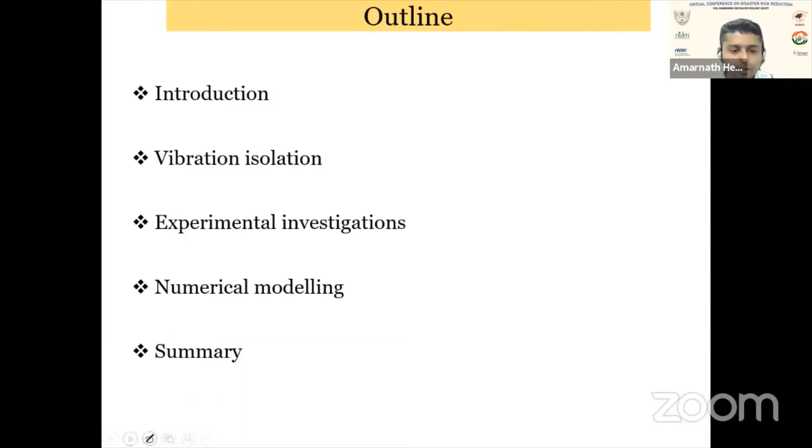Vibrations are very common nowadays. They can be generated from various construction activities, from the movement of vehicles or trains, and from industrial structures and machine foundations. From the vibration source, these vibrations typically travel along the ground surface as a surface wave, specifically as a Rayleigh wave, and these waves can damage nearby structures.

As long as these vibrations are within certain permissible limits, buildings will be fine. Otherwise, it will lead to failure of the buildings, cracking, and in the larger term, cause some amount of disaster. Surface waves can be extremely dangerous, but some part of the vibration also travels along the deeper stratum as body waves, which are not so harmful. The Rayleigh waves, or surface waves, generally cause failure due to this kind of vibration.

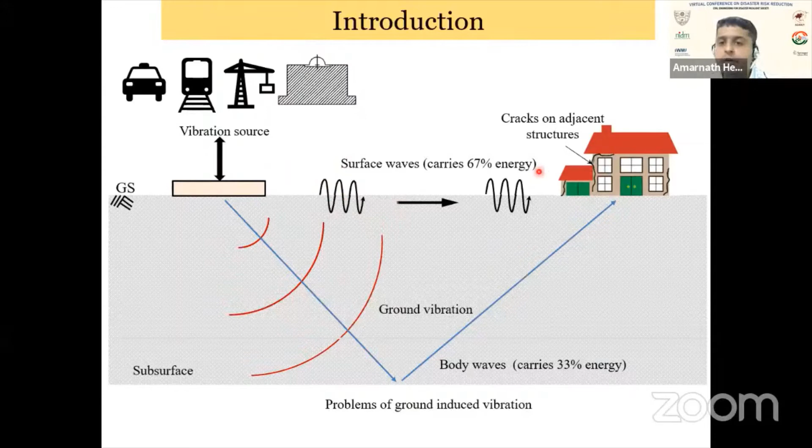These are some photographs which I took during one of my site visits near Patna. This particular building is very near the main railway track, the Delhi-Kolkata railway track, and due to the frequent movement of trains, we can see a lot of cracks in the building.

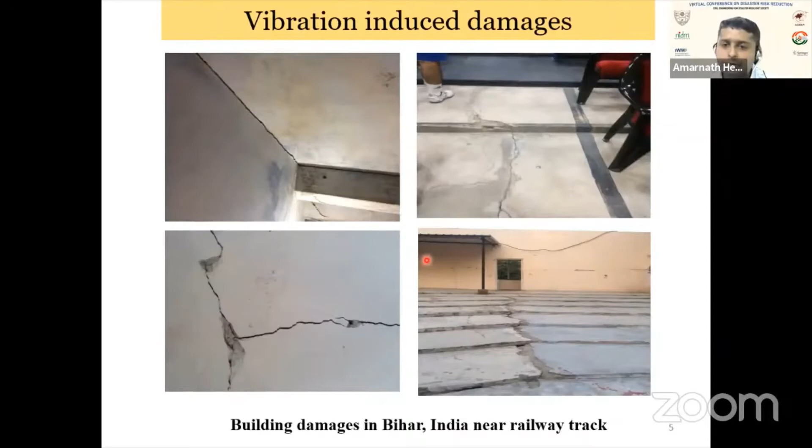So these are all sorts of cracks in the structure, in the floor, everywhere. And this kind of cracks can lead to a disaster. It can lead to a failure of these kinds of buildings.

So each country basically has its own guidelines for these vibrations, and they have developed their own threshold values. Below this threshold value, if the vibration is there, then there is no harm to the building. But the instant the vibration exceeds a particular limit, the buildings can be subjected to some amount of risk.

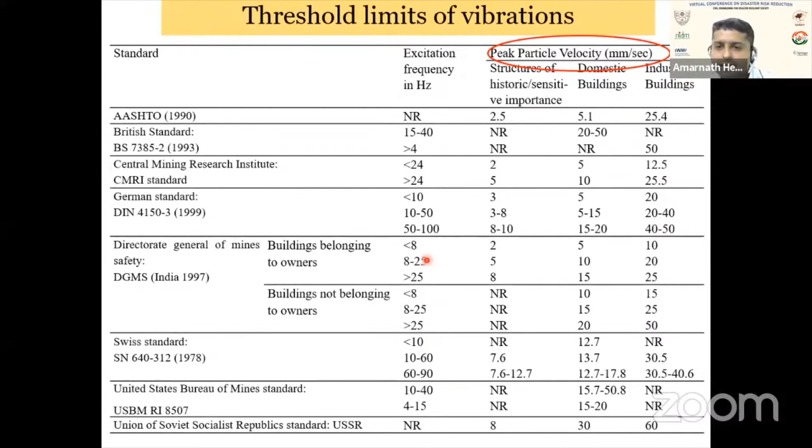Generally, these vibrations are measured by a parameter called peak particle velocity, which is nothing but the velocity of the particle due to the vibration. Under the vibration, particles will vibrate. If you measure that velocity in 3 orthogonal directions and take the average, it gives the peak particle velocity.

Different countries or different standard codes have their own guidelines, be it AASHTO, British standard, German standard, or Swiss standard. All these have their own guidelines for the threshold value of vibration. These vibrations are categorized into sensitive buildings, domestic buildings, and industrial structures.

It also depends on the frequency of the incoming vibration. The frequency of the vibration again depends on the source of the vibration. If it's a railway vibration, the frequency will be somewhat different. If it is a machine foundation, the frequency will be different.

But as long as these vibrations are within permissible limits, there is no problem to the buildings. The instant it exceeds this particular threshold, it can lead to cracking in the building. So whenever it exceeds these threshold limits, the isolation aspect comes into picture.

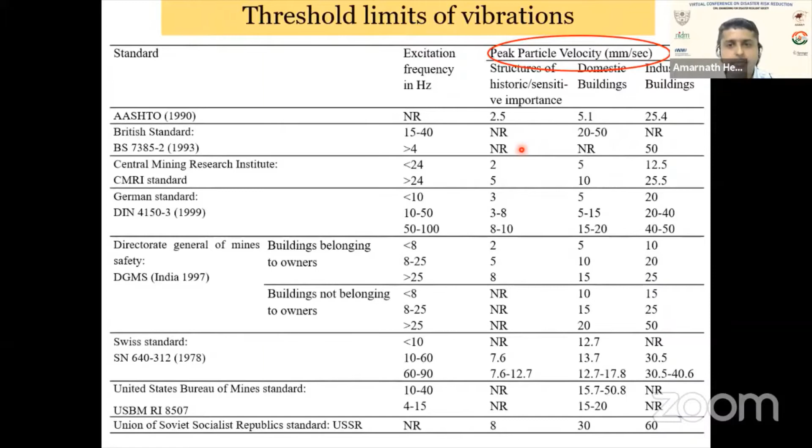Isolation is nothing but reducing the intensity of the vibration, or protecting the structure from the incoming vibrations. If you look into the literature, there are various isolation methods being followed all over the world.

The most popular one is wave barriers, in which we create some sort of open and infill trenches for isolating the buildings from vibrations. If it is a machine type of loading, then we can go for absorbing systems like springs or rubber coil systems. Else, we can also strengthen the ground using any of these methods for altering the incoming waves.

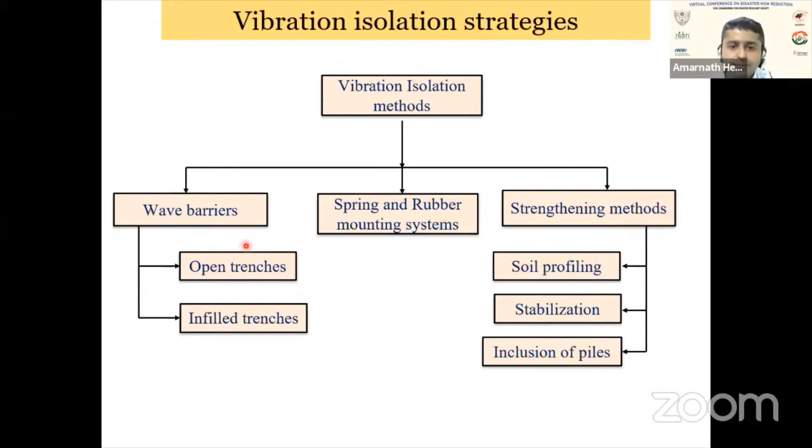So the most popular one is basically these wave barriers, open trenches or infill trenches. In this trench system, how it operates is that this is basically a source of vibration, and we will basically create shallow trenches near to this source of vibration.

Since the vibration waves are basically surface waves, these shallow trenches will create some sort of obstruction for the coming waves, hence reducing the intensity of the vibration. These trenches can be open trenches, or they can also be infill trenches where we fill some absorbing material.

If the trenches are placed near to the source of vibration, we call it an active isolation system. If the trench is placed near to the structure to be protected, then we call it a passive isolation system.

This particular system is relatively effective and has good efficiency in isolating vibrations, but the only concern is the depth of these trenches. Generally, the depth of the trench varies from 3 to 4 meters.

If you consider a scenario in an urban area or soft soil, creating a trench of 3 to 4 meters deep is extremely challenging, due to safety concerns, environmental issues, or stability aspects. In those cases, we sometimes infill with soil, which will slightly increase the stability, but the efficiency-wise, it will not improve that much.

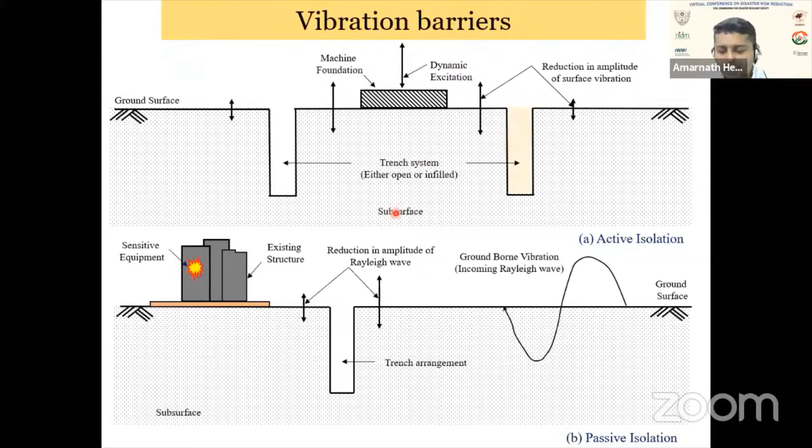Because of all these limitations, what we are trying to propose is to develop a new sort of isolation system, which can be placed just below the vibration source. I can call it an active isolation system, because it's placed exactly below the vibration source, and it is made up of a material called geosynthetics, which is a polymeric material.

We are proposing to use materials like geocells or biaxial geogrids to be part of this vibration isolation barrier, such that it can absorb some amount of vibration. These geosynthetics are popularly used for increasing the bearing capacity of the soil or reducing settlement. If they can absorb some amount of vibration as well, it will be a manifold benefit — bearing capacity-wise, settlement-wise, and also isolation of vibration.

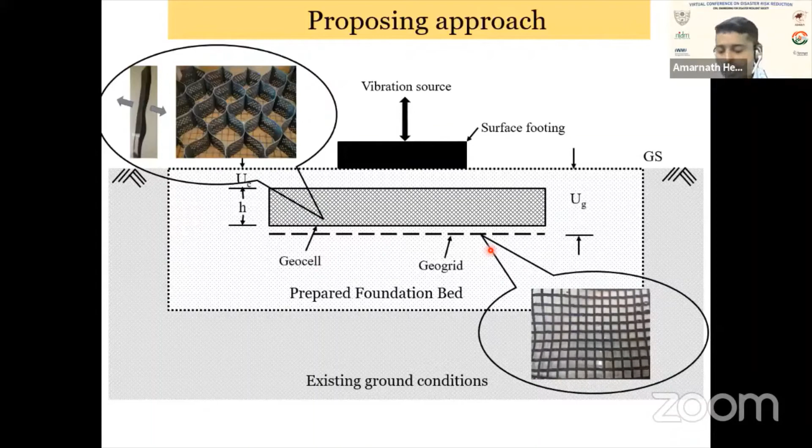So we can place this kind of material below machine foundation, below railway tracks, below the pavement. All these are major sources of vibration. The reason we have gone for this geosynthetic material is because these are economical, and we wanted to develop a cost-effective isolation system that facilitates easy construction. These are extremely durable and resistant to extreme weather conditions, and no heavy machineries or specialized skilled labor force is required to construct these geosynthetic structures. Because of all these advantages, we thought of using this material for developing an isolation system which can absorb the vibration.

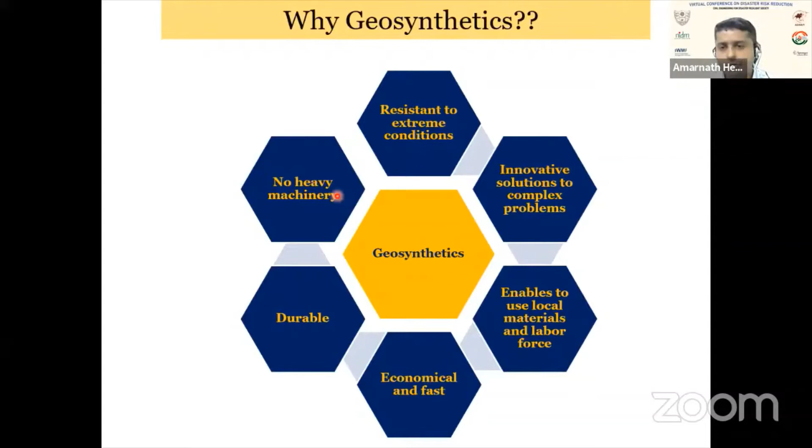So these are the two materials I'm going to talk about. One is biaxial geogrid, which is a planar type of geosynthetic material, and the other is a three-dimensional type of geosynthetic material, which we call geocell. In case of geocell, we fill this geocell pocket with granular geomaterial like soil or sand, which helps the geocell apply all-round confinement to the soil and overall improve the performance. In case of the biaxial geogrid, it will also improve the lateral confinement on the soil by virtue of frictional and passive resistance.

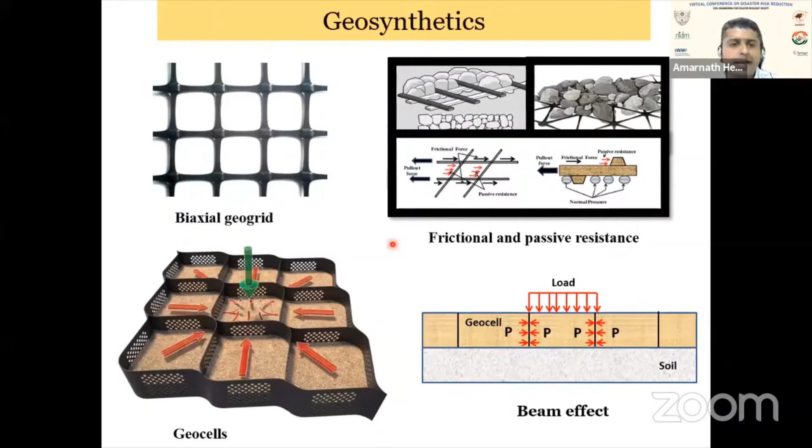Whenever we use this kind of material, it will basically generate some friction between the soil and the geosynthetics—we call it frictional resistance. Also, these ribs will try to confine the movement of the soil. So by virtue of that, both these materials are known for applying lateral confinement to the soil, and thereby improve the performance of the soil.

So now I enter into our experimental investigation. These are field vibration tests we have conducted just to demonstrate that this geosynthetic-based isolation system can absorb vibration and increase the isolation efficiency of foundation beds. In this experimental setup, initially we construct a foundation bed made up of geosynthetics, and above that we place an artificial source of vibration using a mechanical oscillator. This oscillator can vibrate at different frequencies ranging from 5 Hz to almost 50 Hz, and it is connected to a DC motor which helps us change the frequency.

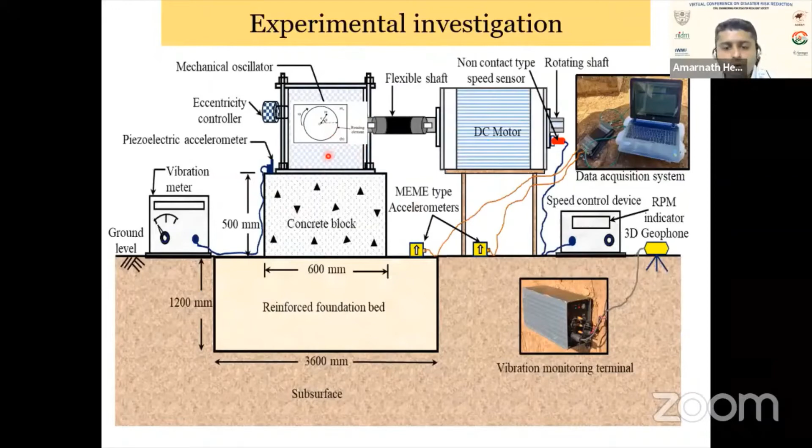Under this particular vibration, we have recorded the vibration along the ground surface. Exactly below this vibration source, we have a reinforced foundation bed to a depth of almost 1.2 meters, and using accelerometers, geophones, and vibration meters, we try to record various parameters like acceleration and displacement on a real-time basis. Using this particular computer, we have captured all this data in real time under the source of this vibration. And this is how the setup looks like.

It is a very tedious experiment, I can say. Initially, we have to create a trench and develop it using a geosynthetic foundation bed. Then we have to use various sensors on a real-time basis to capture all these physical parameters. In order to demonstrate this low-cost protection or isolation system, we have considered 4 cases, which I'm going to discuss—it's only a part of our research.

Initially, we have taken a normal foundation bed with no geosynthetics. In the second case, we have used geogrid, a planar type of geosynthetic, below the vibration source. In the third case, we have used a secondary geogrid layer below the primary layer, just to see the effect of this secondary layer on the primary layer and the overall vibration isolation efficiency. In the final case, we have considered a three-dimensional geosynthetic product, geocell, and we have also tried to fill this geocell with different infill conditions in the field.

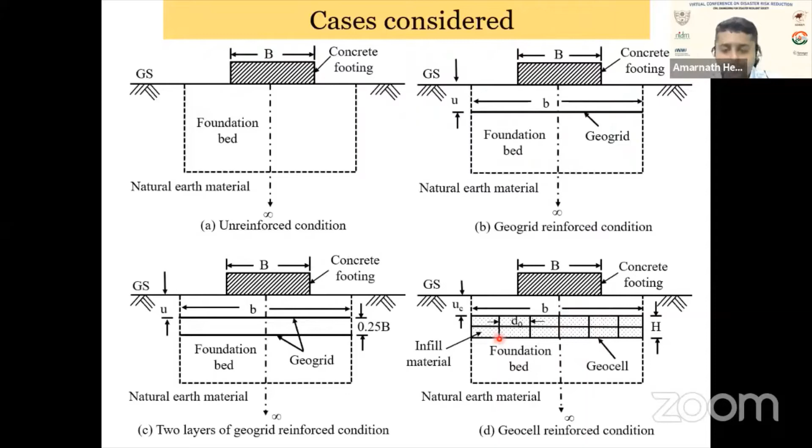So I want to show some photos of how we created a test bed. Initially, this kind of trench has to be dug up in the soil. Then we have to place the geosynthetics in layers. If going for more than one layer, we have to properly compact it and maintain uniform density and moisture content throughout the bed. This one is for the geogrid reinforced case, and this one is for the geocell reinforced case—we can see we are filling it with some local infill soil as part of the geocell.

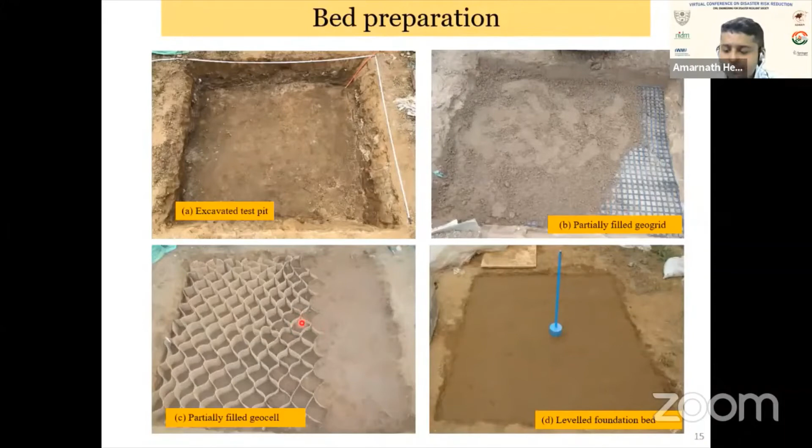I don't want to get into too much detail on the material properties, but I can say that for the geocell we used Neoloy-based geocell, which is a commercial name for the geocell, and a biaxial geogrid made up of polyester, both used as part of the isolation system.

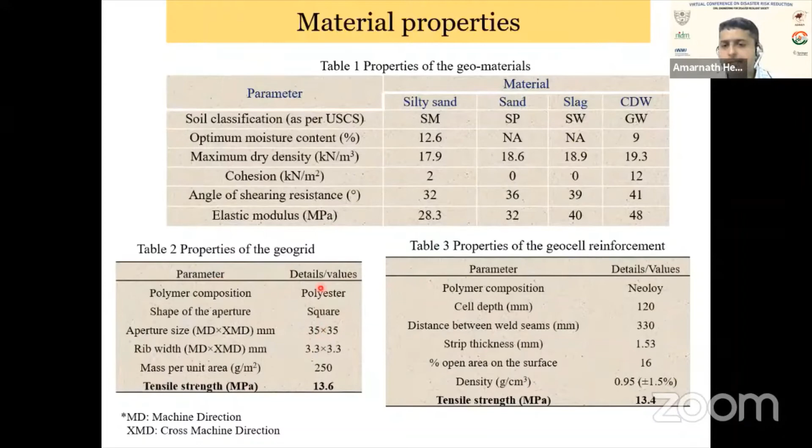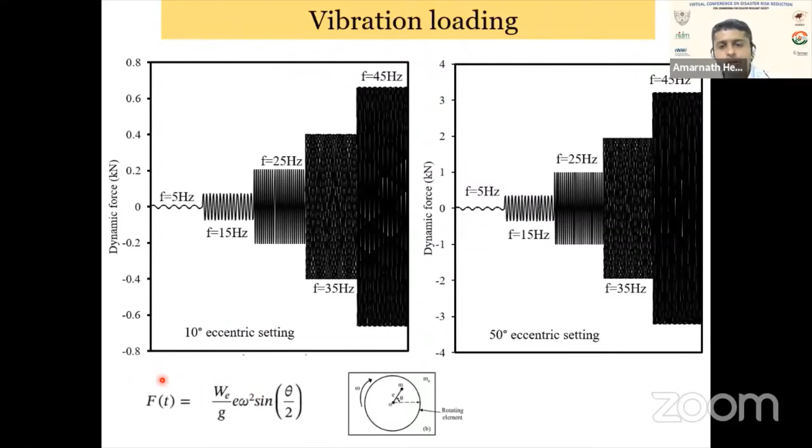I want to show some interesting results. When we change the frequency of vibration, we recorded the displacement of the concrete block used to support the vibration source. With the increase in frequency, at a particular frequency, suddenly the displacement got increased. In all cases, this increase in displacement can be seen - for unreinforced, single layer geogrid, 2-layer geogrid, and geocell.

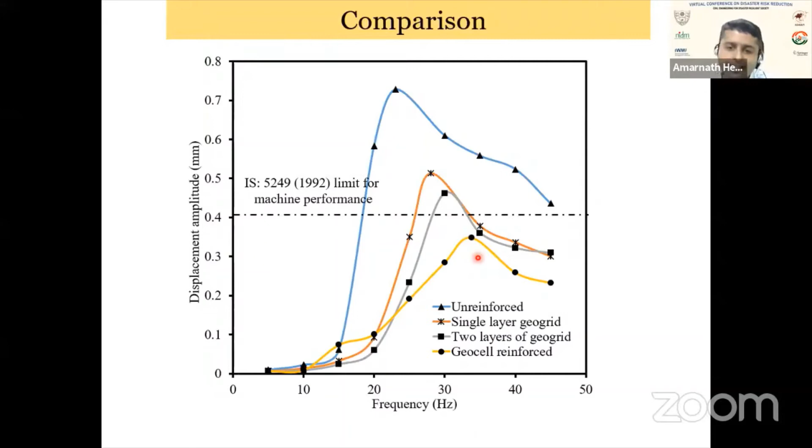This particular condition we call resonance. In resonance, the frequency of the vibration matches with the natural frequency of the soil foundation system, and under this, suddenly the displacement shoots up. If you consider 4 different cases, due to the provision of geosynthetics, there is a drastic reduction in displacement during resonance. When we place the geocell reinforcement, the displacement even under resonance was within the permissible limit provided by the Indian standard. So from here onward, whatever parameter I compare, like peak particle velocity, all are compared corresponding to this resonance condition, because it makes sense to compare these parameters for different reinforced beds under the resonance condition, since at that instance the displacement will be maximum.

So we tried to measure the peak particle velocity again on the reinforced foundation bed on the surface. We could only measure up to 2 meters because it's a field experiment we conducted. Peak particle velocity, as I told, is a unit used to measure the intensity of vibration. We compared 4 different cases here: unreinforced, single layer geogrid, 2-layer geogrid, and geocell reinforced. Here we can see, if you compare the first case and the last case, there is a drastic reduction in the intensity of vibration, or in the peak particle velocity.

If you calculate percentage-wise, it's almost 50% reduction in peak particle velocity noted in the presence of geocell reinforced condition. Even the geogrid reinforced case provided a reduction in peak particle velocity. This gives us a lot of indication that these materials can somehow absorb the vibration or reduce the intensity of vibration just below the vibration source.

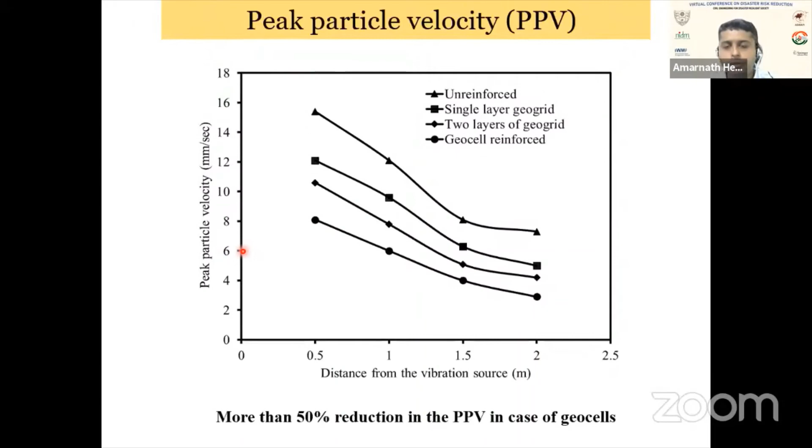We also calculated the displacement on the reinforced soil bed, in terms of percentage reduction in displacement. We call this term PRDA, which is the difference between the displacement of the unreinforced bed and the reinforced bed. If you take the ratio with the unreinforced bed, we get this particular ratio, which tells us how much the displacement of the reinforced bed reduces under this reinforced condition. Comparing different cases with the unreinforced case, the geocell reinforced case yielded the maximum reduction in displacement of the reinforced foundation bed. Almost more than 50% reduction in PRDA was observed in the presence of geocells.

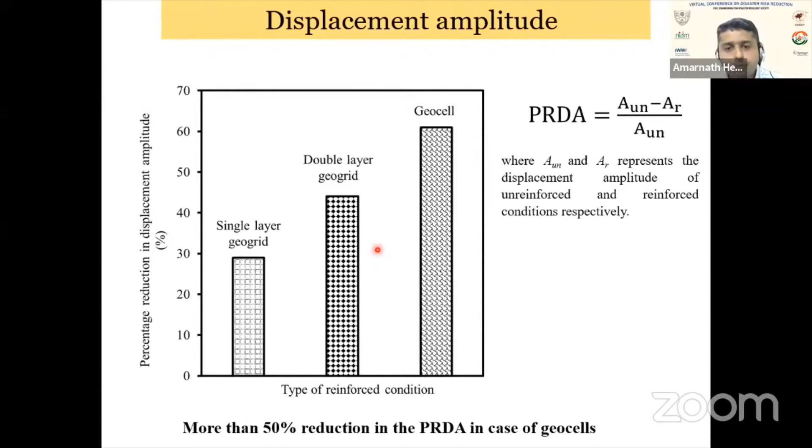Next, we calculated the isolation efficiency of different reinforced conditions. This isolation efficiency is calculated using this simple equation, where ARF is the ratio of displacement of a reinforced foundation bed to the displacement of the unreinforced foundation bed at a particular frequency and eccentric setting. We compared the isolation efficiency for different cases, plotted against distance. I want to draw your attention to this line for the geocell reinforced case, where the efficiency of almost 70% was noted. So a 70% improvement in isolation efficiency as compared to the unreinforced bed was observed in the presence of the geocell reinforced case.

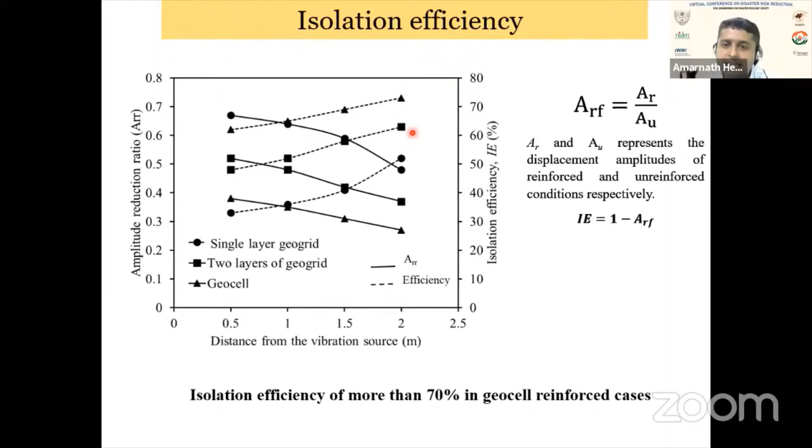This is a very good sign, but experimental investigation could not give us the mechanism why this isolation happens. By providing these kinds of materials, we can only quantify how much vibration isolation efficiency can take place. If you want to develop a mechanism, then we have no option.

We have to go for 3-dimensional numerical modeling, because first of all, these field tests were extremely tedious, and secondly, we cannot see the distributions of stresses and strain in experimental studies. So we have developed 3-dimensional numerical models to find out the mechanism of isolation, taking 4 different cases as in the experimental condition: unreinforced, single layer geogrid, 2-layer geogrid, and geocell reinforced case.

In these numerical models, we considered the subsoil profile also. This chunk of soil is 15 meter by 15 meter by 10 meter deep, whereas our foundation bed was only 1.2 meter deep. So we considered the subsoil profile in the numerical simulation to get accurate results.

One of the challenges of this numerical model was for the geocell reinforced case, because it has a honeycomb shape, a 3D shape. Modeling that actual shape itself is a challenge. With all this difficulty, we were able to develop this numerical model to get the mechanism of vibration isolation.

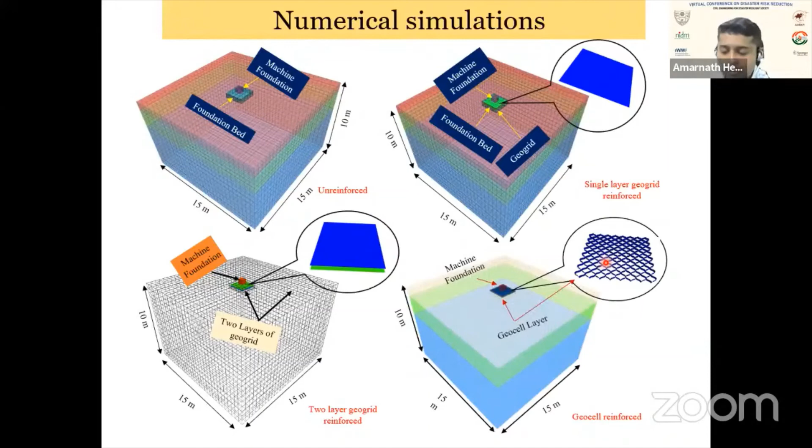Whenever we go for numerical modeling, the biggest challenge is the determination of input parameters. Depending on the constitutive model we select, these input parameters vary. In our case, Mohr-Coulomb was used for simulating the soil, and geosynthetics can be easily modeled using the linear elastic model. We determined all the input parameters in the laboratory.

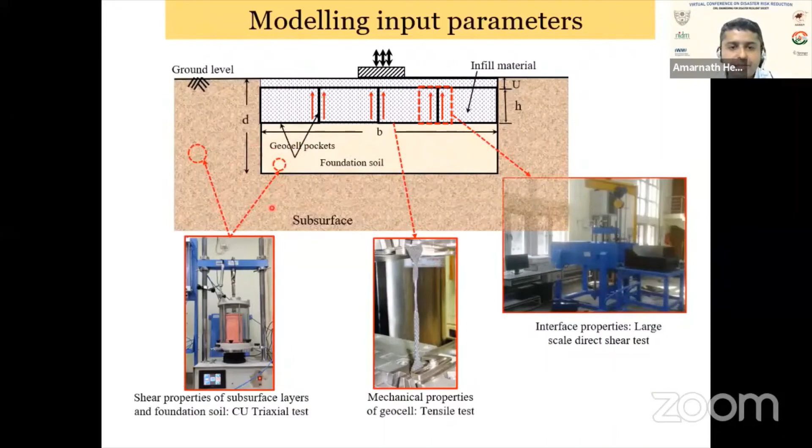Interface plays a very prominent role. For that, direct shear test and modified direct shear test were conducted on the soil-geosynthetic interface. Then tensile test can be conducted for determining the modulus of the geosynthetic material. Similarly, the modulus of the soil can be determined using a simple CU triaxial test.

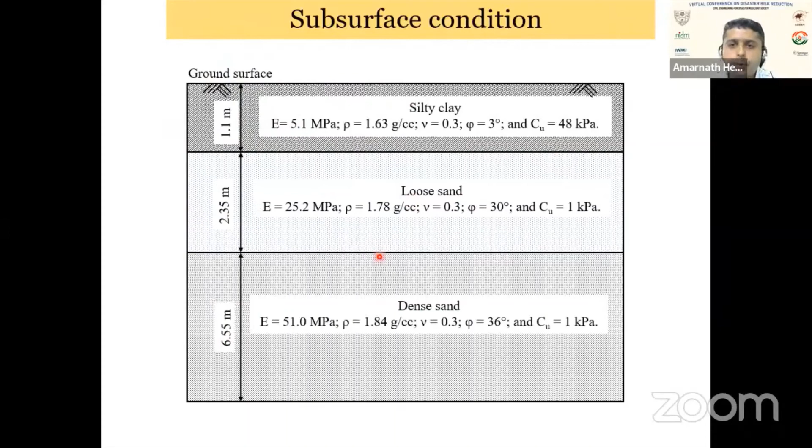This was the subsoil profile in that location where we conducted the testing. The same subsoil profile was considered in the modeling, including all parameters taken from the soil report. These are the material properties we considered in the simulation. I don't want to get into the details of the material properties, but I want to show some of the results.

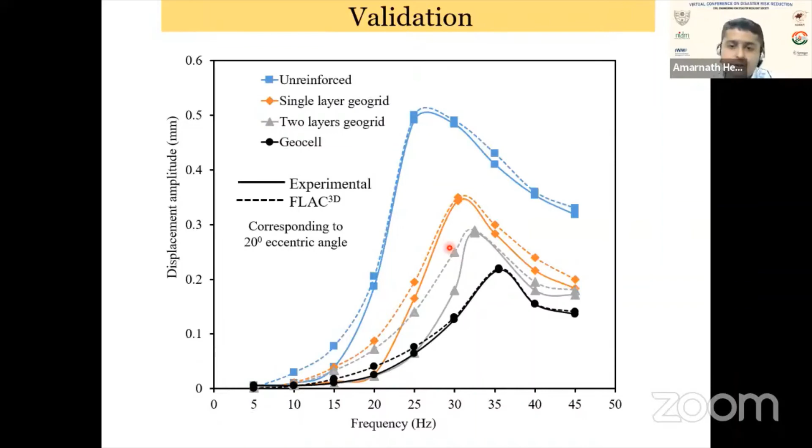The first step in numerical simulation is always to validate with existing literature from experimental study. In our case also, we validated our numerical model with the experimental results, comparing all 4 cases. Once the model is tuned to behave as the experimental results, we used that numerical model for further evaluation. I want to show these interesting contours developed from the modeling.

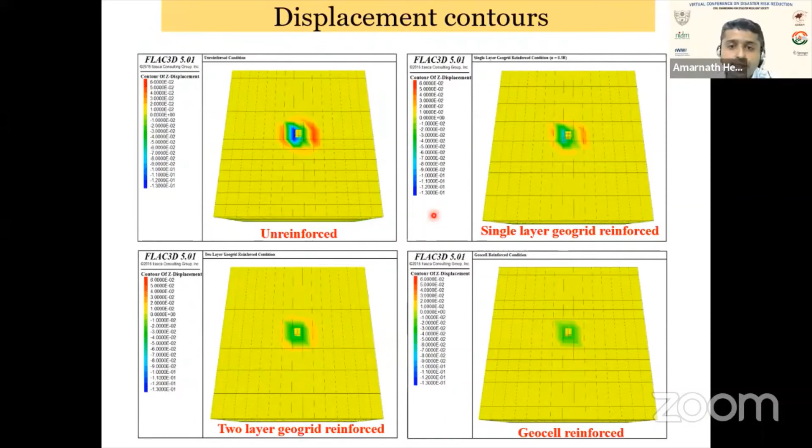If you take the section, we understand what happens: under this vibration source, the geocell will act as a medium for diffraction. It will diffract the incoming vibration and allow it to pass into a deeper soil stratum. So the vibrations are basically moving downward, not in the lateral direction. Since it's not moving laterally, we can basically protect the structure situated very near to the vibration source.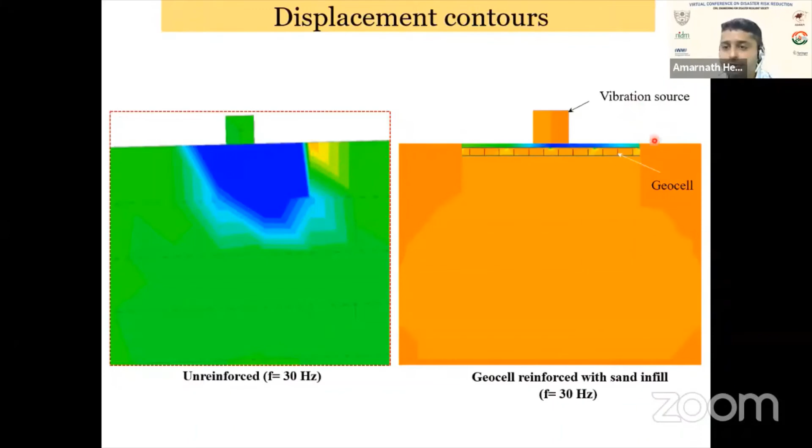So we could measure the strain in the soil because strains play an important role, which tells us whether the foundation bed is undergoing any failure. In case of the vibration, we could not see any failure.

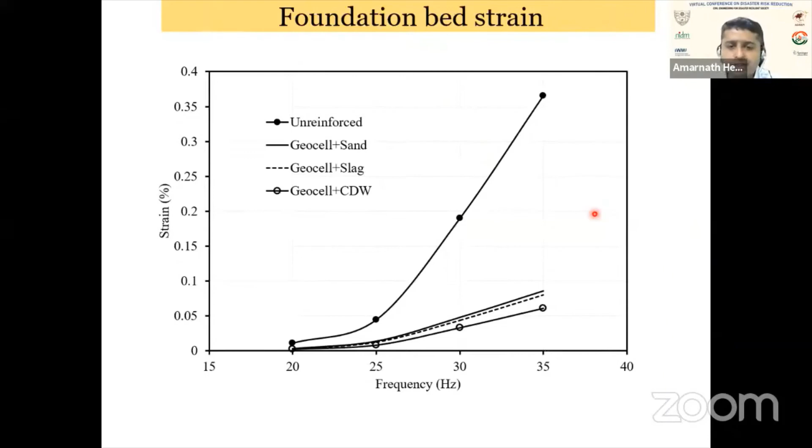In case of the geosynthetic reinforced case, I don't want to get too much into details here. This is the last slide before I conclude. So here we have also noted down or measured the strain on the geocell, or the geosynthetics.

Generally geosynthetics will fail when the strain level reaches around 2%. So if you develop an isolation system, but the geosynthetics fail under the particular vibration, then that system has no use. But if you measure the strain in the geosynthetic under vibration of different frequency from 20 Hertz to almost 35 Hertz, the strain values are around 0.6% to 0.7%. So what it indicates is that these materials will not undergo failure under this vibration. It can absorb the vibration but still will not undergo any sort of failure.

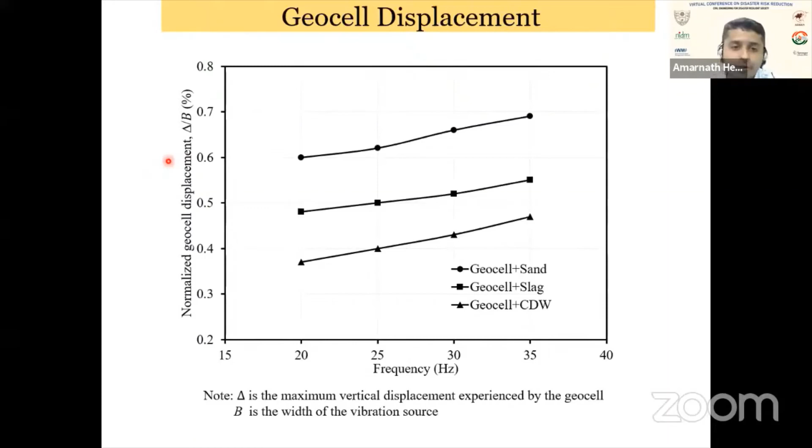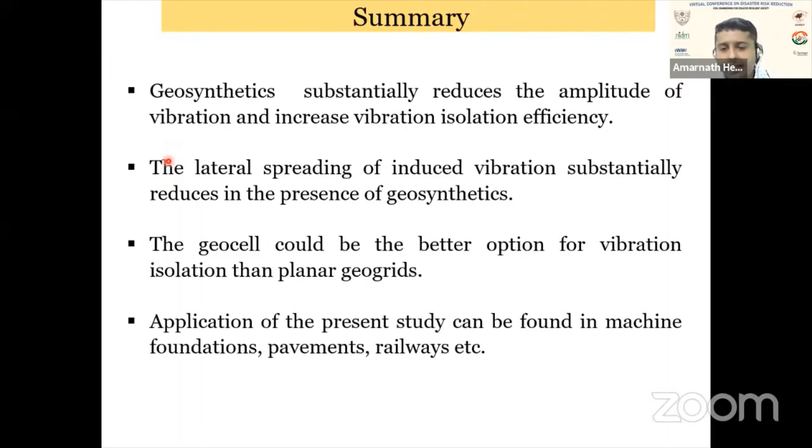So in a way, we got concluding evidence that geosynthetics can be potentially used as an isolation material for absorbing the vibration. And what happens is that the lateral spreading of the vibration can be substantially reduced using this geosynthetics. Out of the tested geosynthetics, geocells were found to be the better option. And as I told before, this kind of system can be used for isolating the vibrations of machine foundations, railway, and pavement related vibrations. So with that, I conclude.